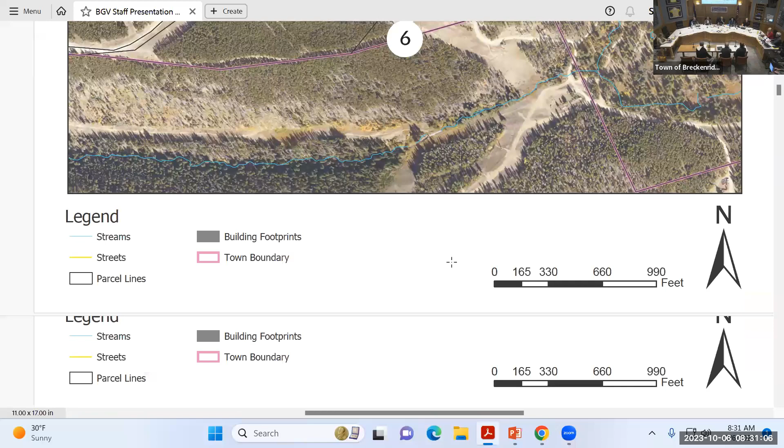Chris is going to pull it up there so everyone can see. We're talking about the existing administration building for the ski area, and that was the site of the former East Peak 8 Hotel. So that's what the discussion is going to be focused on today.

So we're going to take this piece by piece. Staff is going to give a short presentation on each of 4 items, followed by Mike taking you through a little bit of his thought process on those, and then we'll be looking for council input. So the 4 issues are going to be programming and overall density for the project, size, everything like that.

Then we'll be looking at Cucumber Gulch protection. Then we'll be looking at Ski Hill Road traffic. And finally, we'll be taking a look at outdoor energy use as it relates to the recently adopted REMP ordinance that the council adopted a few months ago. So at this point, I'm going to turn it over to Chris to start our first discussion point.

All right, well good morning council. Chris Kulik, planning manager for the record. Just a little preface before I dig into the density and programming section of parcel 4. This process between staff and the applicant has really been a lot of back and forth, and we're really trying to get as much information to you in a timely manner.

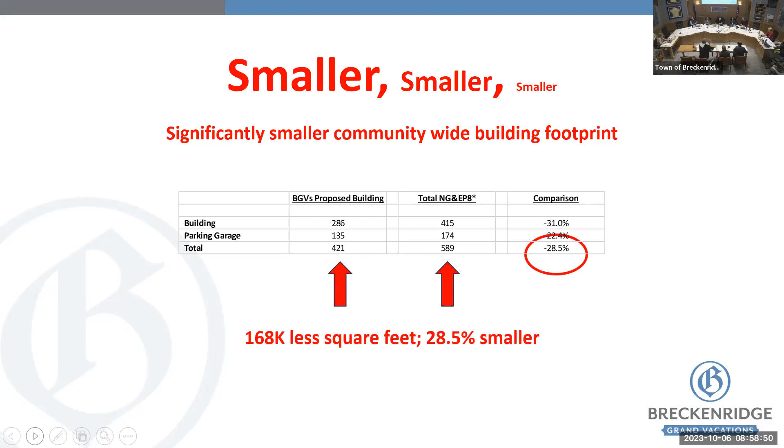Less community-wide vehicles, like Chris said, 279 indoor parking spaces, inclusive of 75 for the ski resort. They've been a great partner in working on this, they've already reduced their count by 45 to get to 75 essential workers up there. I know Jody was, and I'm not sure who's going to continue, auditing that number in a more careful fashion. So I think the 75 for the ski area is the worst case scenario, and they are working judiciously to see if that can be less. The previous building had 333 parking spaces, so a nominally smaller building, but a 16% smaller number of parking spaces. Compared to this hypothetical of what could have happened at Peak 8 and North Gondola, we calculated that scenario at 360 total spaces. So 81 fewer cars in the community, a 23% reduction in cars.

And then on to keys, we're at 203 with the townhomes at 20 keys for 10 units. 214 was the previous count. So just nominally smaller key counts. But again, compared against the what-could-have-been-built scenario, if you added together the East Peak 8 at 146 under today's rules with the North Gondola, it's 318 keys. So when I compare those, it's 115 fewer keys in our community, a 36% reduction.

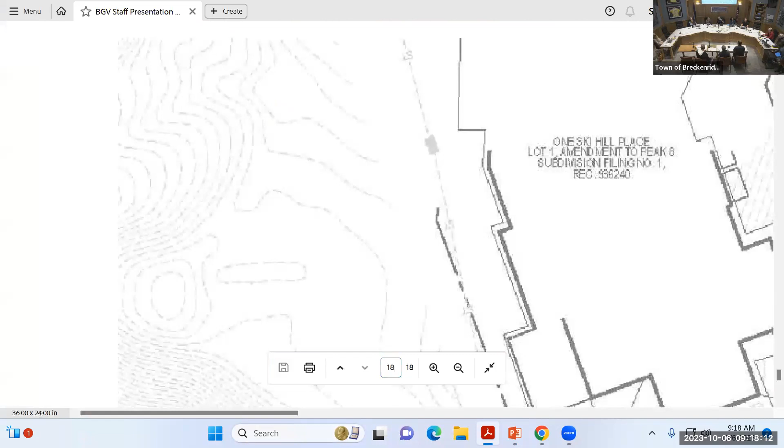Yeah, right there, you can see that's the previous design where it has the big swing coming right in front of Ski Hill Place. And then you can see the brown.

For the truck coming in. And then, I think, in the revised design it comes in more at a quarter angle.

That's actually showing the snow melt there, Chris. We're talking about the previous access. I know, but it's showing that the previous access also had this heated concrete for access there, so that's gone as well.

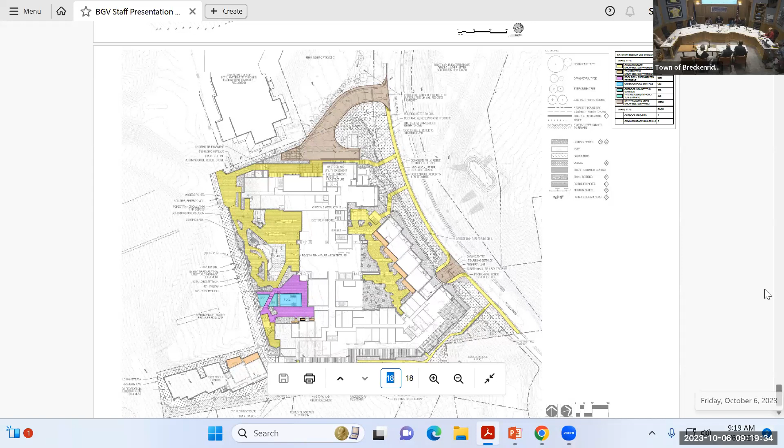Should I get this right? Yeah, I'll try and scroll it. Sorry, I have the page numbers written down. Little center, oh okay perfect, let's type page 12 in. Or that works fine as well.

Now you can see the revised driveway deeper into the site from the north, which we're supportive of. Previously, engineering understood that there's a lot of vehicles coming and going from this building and was supportive of having a second curb cut, because it would create clear separation between guests and deliveries. So we continue to support that, but it would need a waiver or support for a waiver from our engineering standards to have a second curb cut to the site.

We also know that the access, once the building is constructed from Sawmill Road, which would be directly to the east - the dirt road how you arrive to the admin site now - would be permanently cut off, which would be a major reduction in car trips through that neighborhood.

So will that end up being like a hammerhead or a turnaround for snowplows? Yes, for them, yes.

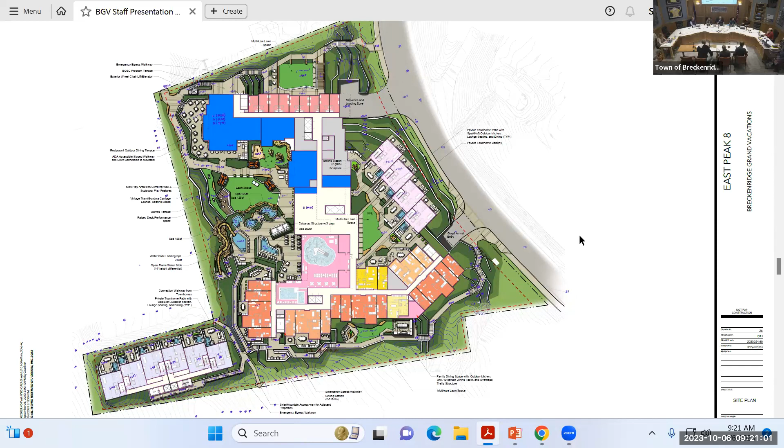We can go to page 3. We'll talk about Cucumber Gulch impacts, which obviously the gulch is always a huge part of anything we're looking at when it comes to any development. So hold on, before you go to Cucumber Gulch, does anybody have a problem with the waiver for a second curb cut access point?

No, okay. Eric, did we go down the line on just the density, the size of the building? Wasn't that question one he had asked? I'm just hitting his blue questions, so. That's fine, maybe we can go back before we jump into the gulch.

I think it probably makes sense to get your feedback on that. Yeah, we had the question above the table - it says, is the council comfortable with the proposed density and programming? Yeah, so it's up there. I couldn't even see it because it's sort of a carryover. Okay, so there you go - is the council comfortable with proposed density and programming? You want to start, Dick?

Sure. I think generally I am, but I'm troubled with the 75 parking places. I think they may relate to the support. However, when we modified the master plan to allow support to be free density, we didn't allow parking in addition to that to be free density. I don't believe parking was mentioned at all in relation to support, so I'm fine with the support being free density - I'm not fine with the parking. I really think it's better suited in what is currently being used as paid parking up in the Stables lot.

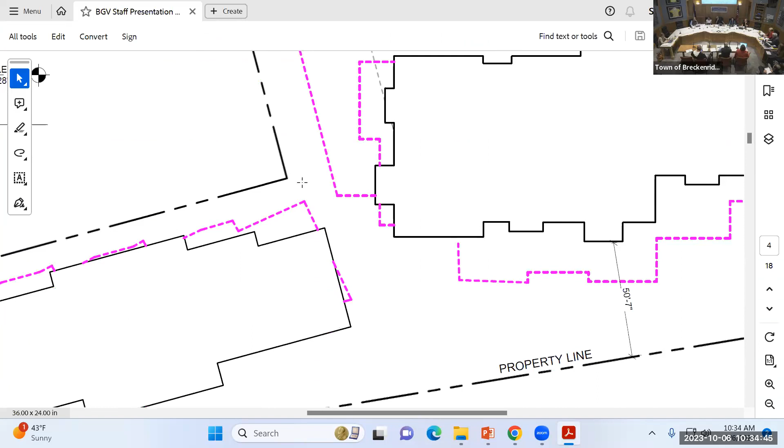Anyway, bottom line on this is what BGV is requesting is two things. One is that they're able to address the offsetting of the outdoor energy use in a little bit different way, which I'll talk about in a minute.

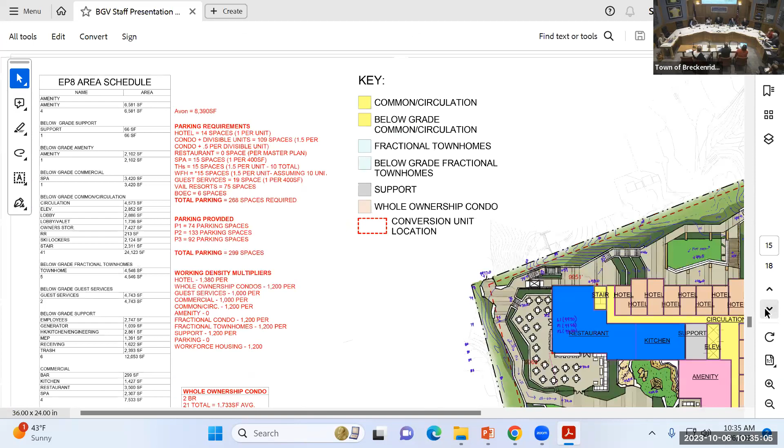And then secondly, they are requesting a waiver from the point assignments for the negative point assignments.

So it looks like we're pulling up the old one. That's the old one. Then if you go up one page.

There you go. So this is the outdoor heated space right now that's being proposed. The good news is, compared to the older plan you just saw, REMP is in effect creating an environment where developers are looking at reducing this outdoor heated space significantly.

The old East Peak Hotel had 51,000 square feet of outdoor heated space. What Mike's team has shown, and they've done exercises to reduce to the maximum extent they can, is they're down to 20,000 square feet of outdoor heated space. So REMP's working, bottom line, which is fantastic. That was the whole goal of this.

A lot of the space has to do with the outdoor heated pools, the space right around those pools and hot tubs. And then those narrow strips, I don't know what color that is, orange or red, those are all emergency egress sidewalks that they're proposing to heat as well.

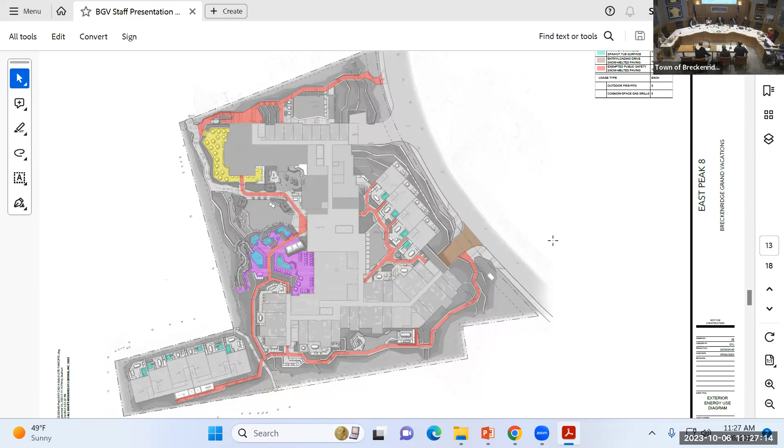That only had 3 years vesting. Right after we approved that master plan, we had a lot of code changes, with rent being one, and density and mass being probably the biggie, where that master plan specified density and mass. So if that were extended for 20 years, someone else could have come along and built something long after we wanted less intensity on that site. It really precludes the opportunity to make code changes you think are important, because those aren't relevant if it's specified in the master plan.

Not all policies are identified in the master plan, but think of all the code changes that have happened since the original amendment to the Peak 7 and 8 master plan 20 years ago — that's why you don't want to give such a long fuse. But from a staff perspective, understanding all the steps needed to continue on this path and that you're negotiating in good faith, 5 to 7 years actually does seem fairly reasonable, if not ambitious, to get everything accomplished.

Yeah, we have multiple development agreements, but just to bring it back, there was the timeline. It was 3 years. They didn't ask for extended vesting, they just did that per code. There was no development agreement associated with the original development. Once that expires, then the provisions that don't align with the code—the biggie being the mass identified in that master plan—would expire, and then they would have to come back and have a master plan that complies with the code. Really, right now, if you approve a development agreement...